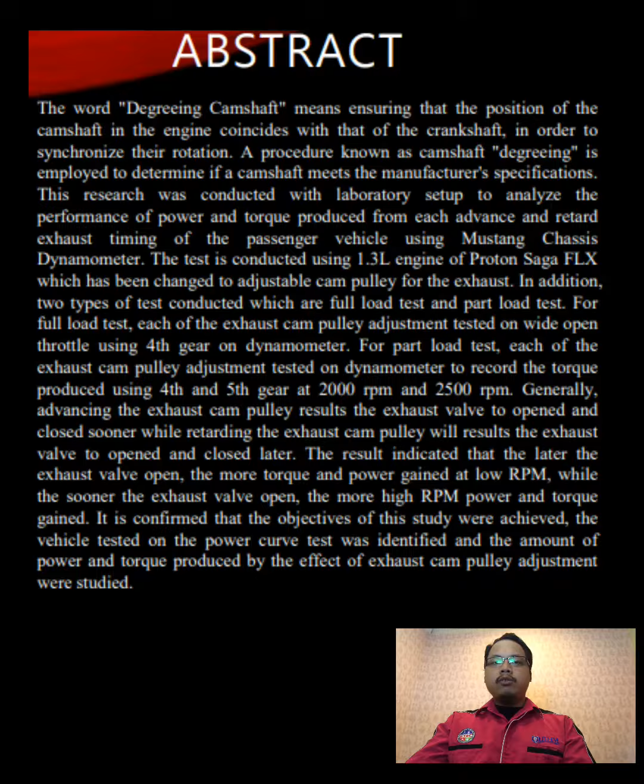For the introduction, the word degreeing camshaft means ensuring that the position of the camshaft in the engine coincides with that of the crankshaft. In order to synchronize their rotation, it is the only way to know whether the piston rise and fall matches the valve opening and closing correctly, so that the engine works properly. A few degrees of misalignment can have dramatic effect on the engine.

The relative position of the camshaft to top dead center (TDC) affects the valve timing events across the entire firing order, which can have substantial effects on the resulting horsepower and torque curves. Degreeing the cam not only ensures that the cam can account for manufacturing tolerance, but also allows a builder to adjust the cam timing for performance.

The objective of this project is to study on achieving the correct valve opening and closing points of the engine, and to study the effect of advance and retard on exhaust camshaft towards performance in terms of power and torque.

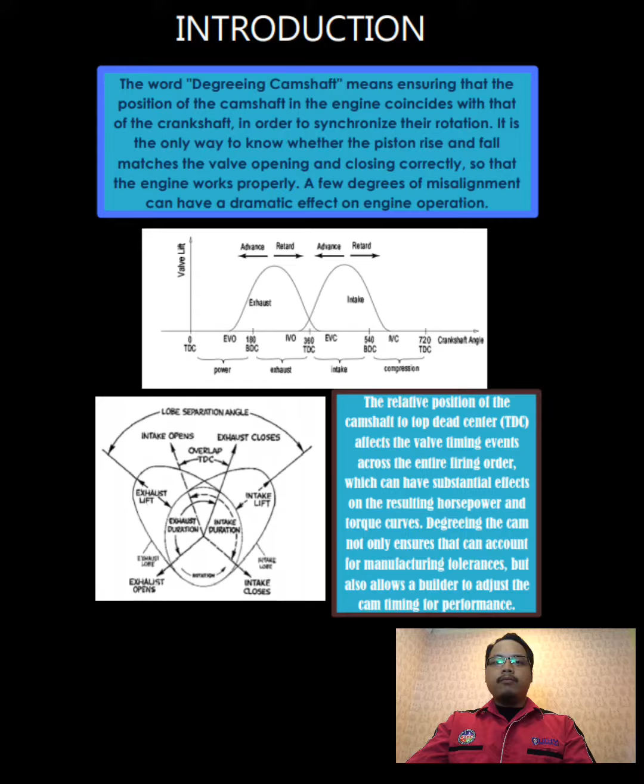For the literature review, as we can see from the table above, the table shows the findings of previous articles related to camshaft overlap and performance, variable cam timing, advancement in variable valve actuation, and fundamentals of internal combustion engines.

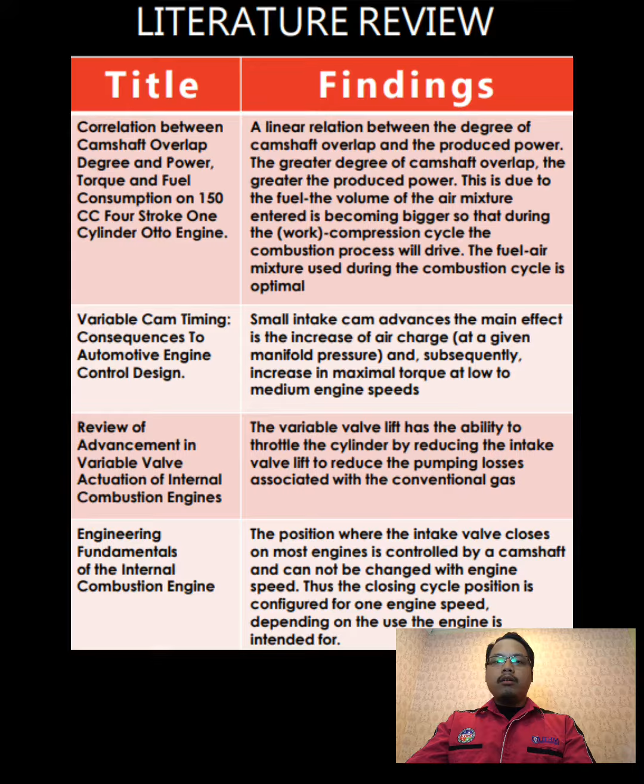Next, for the methodology, after identifying the problem, objective and scope of this project, doing some literature review based on previous articles related to the effect of camshaft degreeing towards performance. Then, define the experimental parameters as the project will run using Mustang chassis dynamometer and advance or retard the exhaust camshaft by using adjustable cam pulley.

The test started after the engine warmed up for about 15 minutes. The data of engine speed, torque, and power will be displayed on the connected PowerDyne PC. Data collected will show the engine speed and the performance produced from the experiment.

For the experimental method, first is degreeing the camshaft, which is finding the top dead center. The top dead center mentioned is the position of piston number 1 at the top and the position of valves in a closed state for intake and exhaust. This position is called compression stroke in the cycle of a 4-stroke engine.

Then, find the open and close of the exhaust and intake valves. All of these processes were done by using a dial gauge indicator and degree wheel attached to the crankshaft pulley.

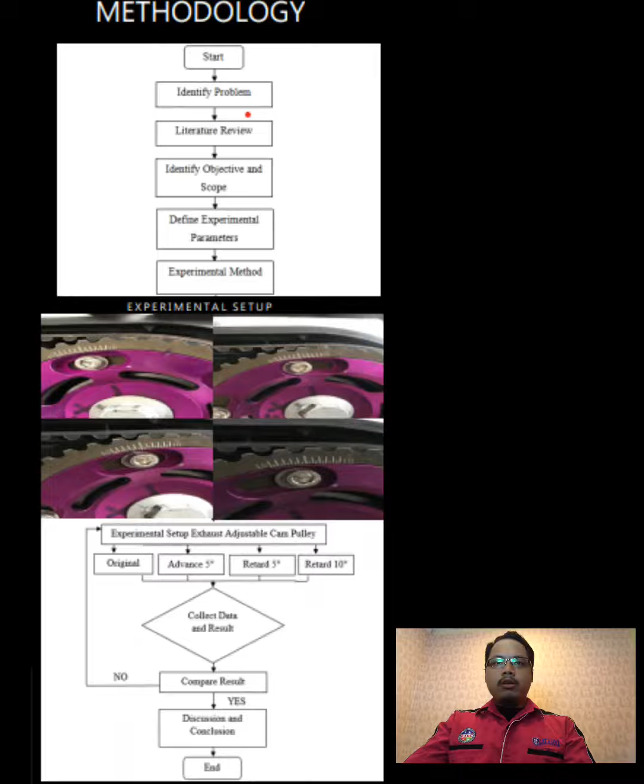For the result and discussion, the main purpose of the camshaft dial cam in this experiment is to know the original centerline of the camshaft. This is because when the original cam pulley is changed to an adjustable cam pulley, it is likely that the centerline will slightly not follow the original spec.

In this experiment, after being converted to the adjustable cam pulley, the dial cam process was rerun to ensure the camshaft centerline was as original. Therefore, this vehicle is allowed and ready for the next experiment, which is the dynamometer power curve test.

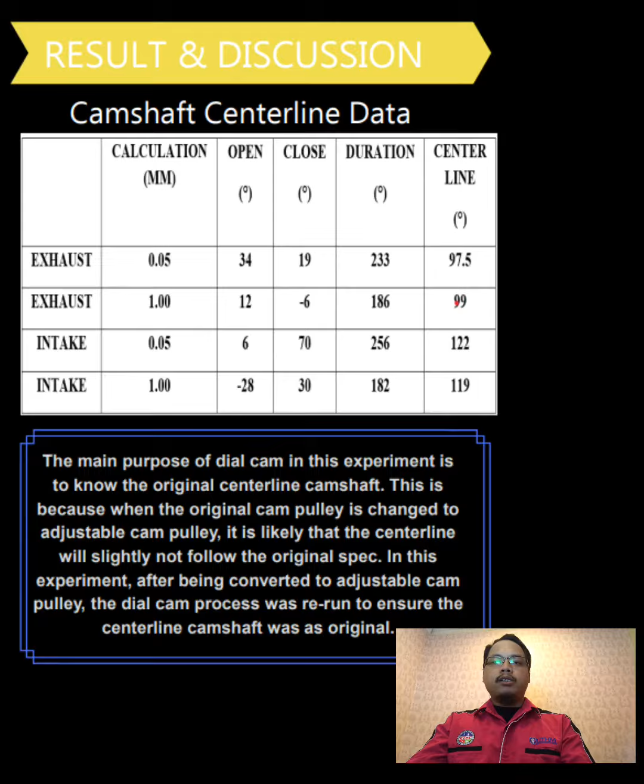Okay, for the power curve full load result at low engine speed, 3250 rpm, the power increased by an average of 4.7% for advanced 5 degree, and it shows no power improvement from 3250 rpm to 4000 rpm compared to the standard exhaust setup. This is due to valve overlap being reduced.

It can be seen that retard 5 degree has little improvement of power at low engine speed and significantly increases at middle rpm compared to the standard exhaust setup. This is due to the valve overlap increase. It induces more air inside the combustion chamber, thus producing more power.

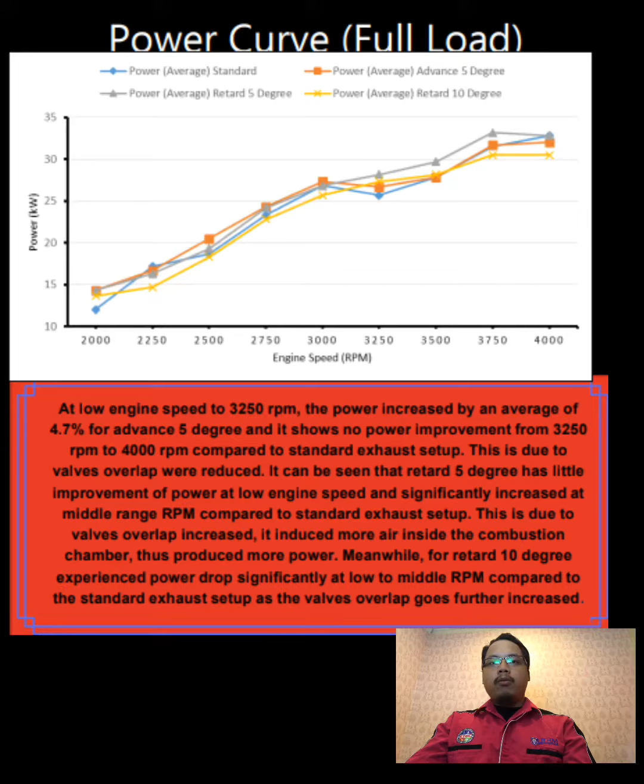Meanwhile, retard 10 degree experiences a significant power drop at low to middle rpm compared to the standard exhaust setup as the valve overlap is further increased. This is possibly due to excessive exhaust residual inside the combustion chamber due to the bigger overlap. Higher residual will lead to lower combustion efficiency, therefore the power is reduced.

Okay, for the part load test result, the graph at 4th gear 2000 rpm and 2500 rpm shows that advanced 5 degree produces 1.4% higher torque than the standard exhaust setup. It also shows that retard 5 degree produces 2% lower torque than the standard exhaust setup. It can be seen that retard 10 degree produces the lowest torque among all exhaust setups.

On the other hand, at 5th gear 2000 rpm, advanced and retard 5 degree show a significant increase in torque, and at 2500 rpm the standard exhaust setup was slightly highest among advanced and retard 5 degree exhaust. Meanwhile, retard 10 degree produced the lowest torque among all of the setups.

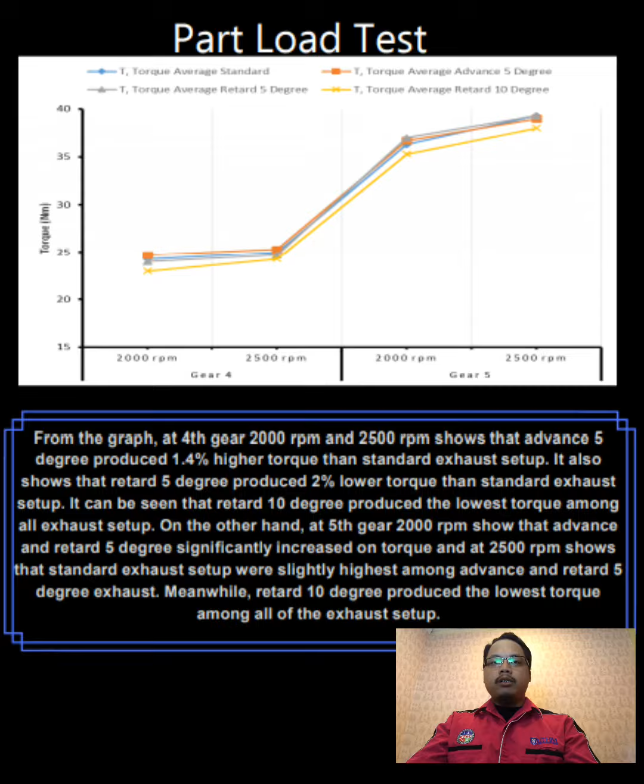So for the conclusion, last but not least, the different adjustments of the exhaust cam pulley have shown that they will affect the vehicle's engine performance by measuring the amount of torque and power generated by the engine. Advancing the exhaust cam pulley will result in the exhaust valve opening and closing sooner, while retarding the exhaust cam pulley will result in the exhaust valve opening and closing later.

Exhaust opening occurs near the middle of the power stroke after the spark plug is fired and the flame front expanded, and it pushes the piston downward. Once the exhaust valve opens, the exhaust begins exiting the chamber and cylinder pressures drop rapidly. Then the combustion chamber is used to force the burnt mixture out of the exhaust. During the exhaust stroke, the remaining exhaust gases will be pushed out by the piston, making room for the next charge of air and fuel mixture.